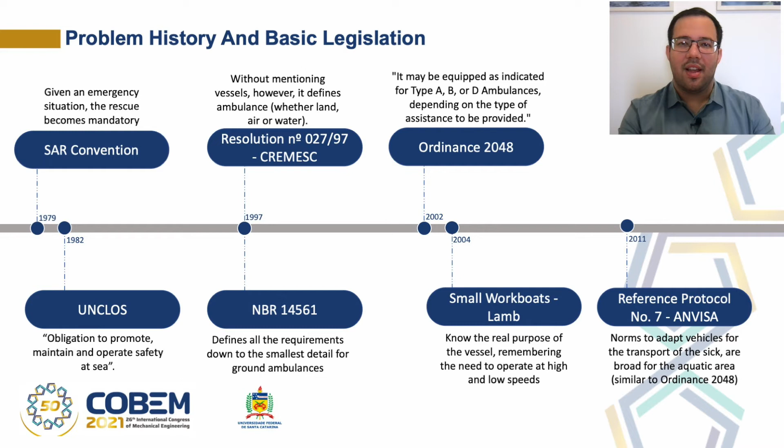In terms of history and legislation, in 1979, the SAR Convention was created, forcing the countries to carry out the rescue whenever there was an occurrence. And as the years went by, new creations and laws emerged. In 1997, the NBR 14561 was created, defining in detail the characteristics and requirements for land ambulances. Only in 2002 is the rescue vessel defined, but without any level of detail. Until today, there is no specific definition.

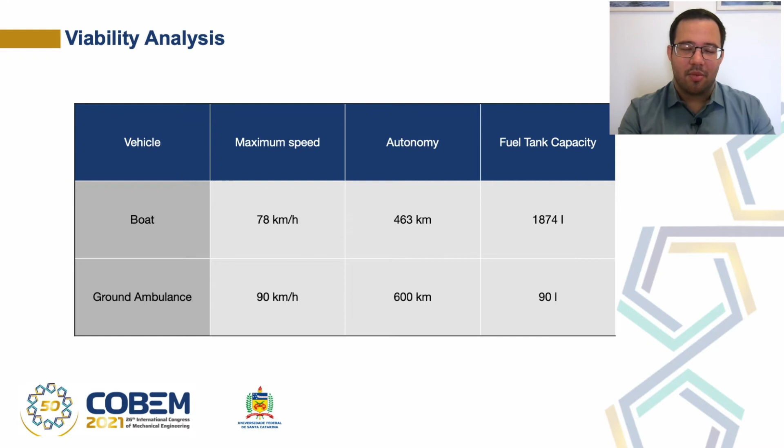To see viability, a direct comparison was made between the rescue vessel and the ground ambulance. The vessel is slower and has less autonomy. However, when applied in practice, there is an interesting result. For that, let's analyze a hypothetical victim on Sambaqui Beach in Florianópolis. Rescue time using a vessel is shorter even when considering an ideal traffic scenario, with all traffic lights open and at full speed for the land ambulance.

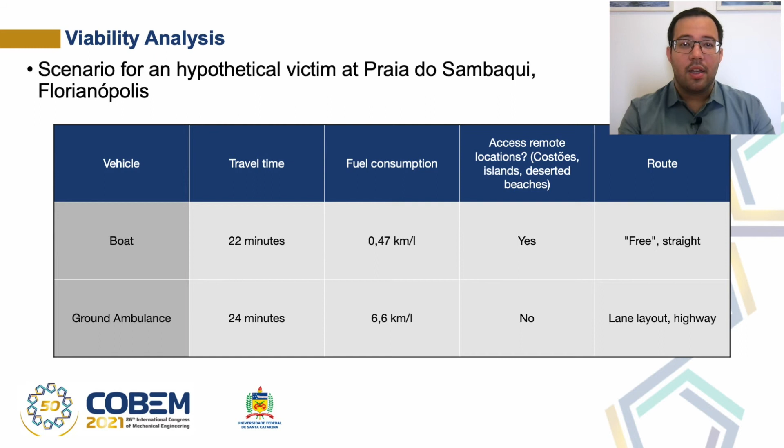This is due to the fact that the vessel has a constant speed over a shorter distance as it travels in straight lines without having to follow a path on the road. And in addition, the vessel also accesses remote locations. We need to keep this in mind.

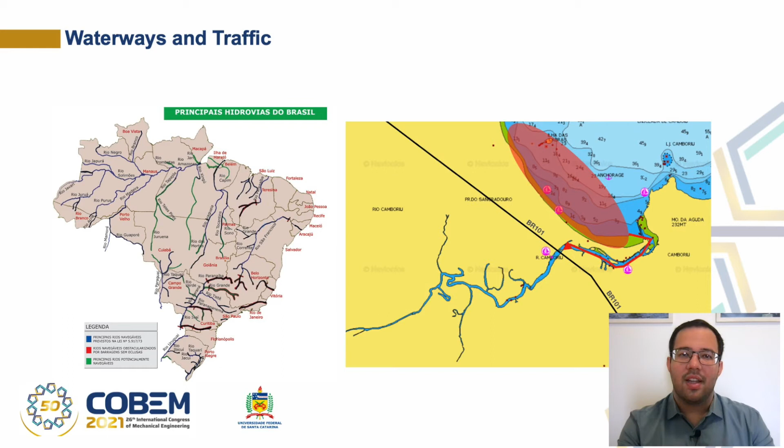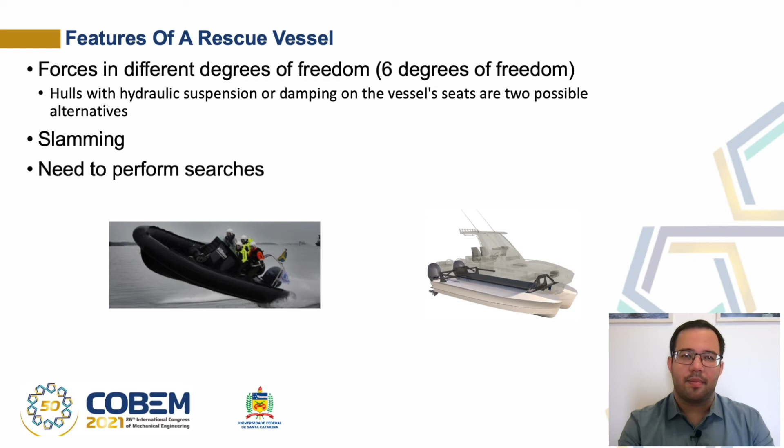Analyzing the operation, in order to define the demands, the division between basic life support and advanced life support must be kept in mind. However, in practical terms, we do not have the need or the ability to operate the SAV, the Advanced Life Support. The SAV requires an on-board doctor and invasive procedures to be performed. Furthermore, it's quite easy to equip a basic unit for advanced support as nothing changes in terms of layout.

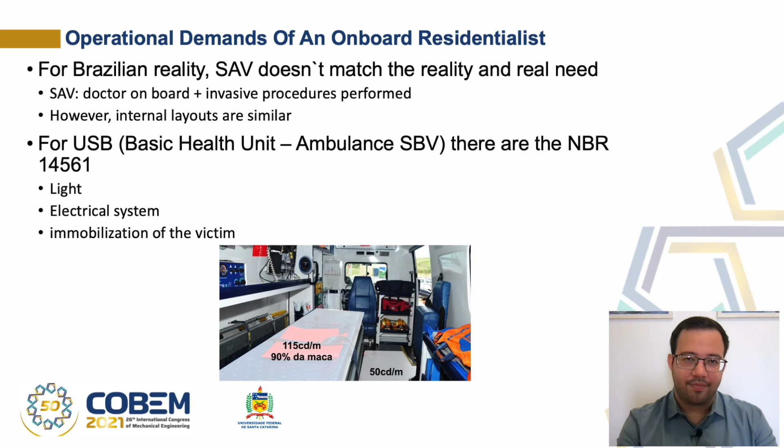Also, with regard to the operation, the vessel needs to be able to operate in storms, to have adequate lighting systems, communication systems, the ability to return to the initial balance position if it capsizes, and have adequate autonomy. Some of the necessary embedded systems are the GPS, radar, security cameras, radio, sonar. These equipment will help the rescuer to reach the victim, to locate the other vessel, to ask for support, to have a view of the entire vessel without having to move, and also make a medical adjustment on the victim.

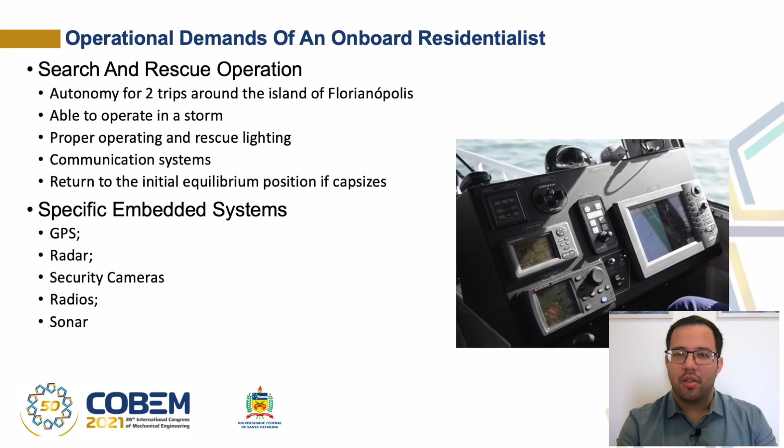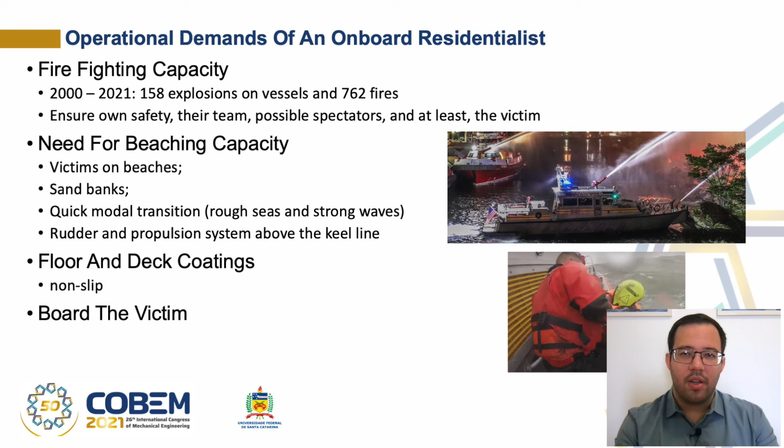Other operational requirements are the firefighting capability, the beaching capability, the non-slip deck, and systems to assist the victim boarding. Firefighting is necessary given the number of occurrences with fire and also the fact that the rescuer only rescues the victim once the scene is safe, therefore any fire extinguished. Stranding is linked to the modal transition, so to support in regions with sandbanks or shallow depths. And remember that both the rudder and the propeller in this case must be above the keel line.

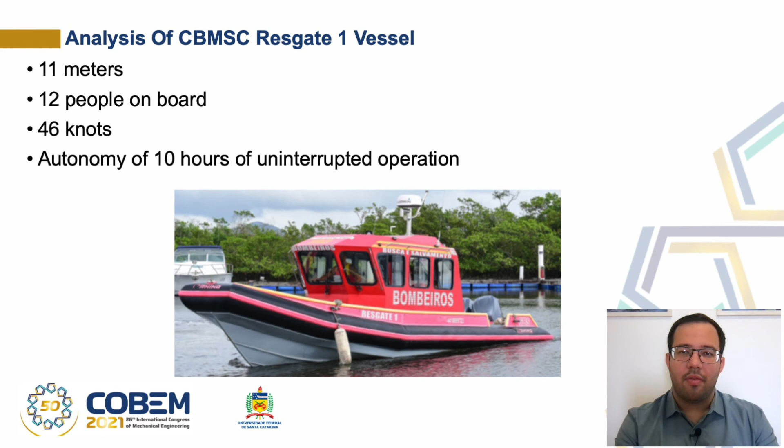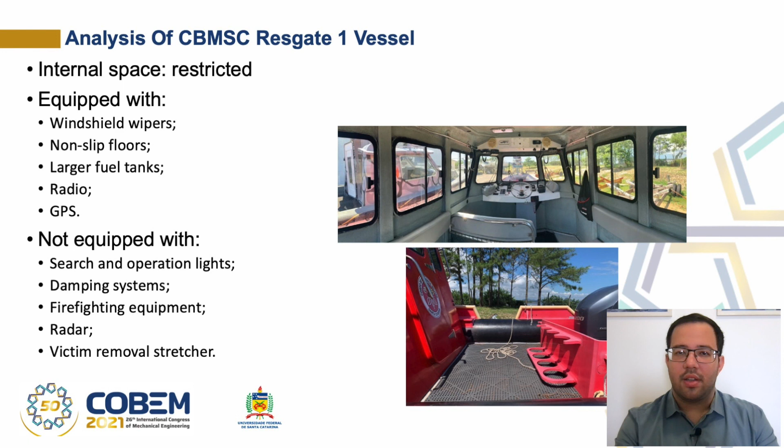Today, in the Santa Catarina region, Reno Defense Company vessels are widely used. So, in order to complement this article, the authors analyzed it based on the points raised here. The Resgate 1 vessel has 11 meters, capacity for 12 people, reaches up to 46 knots, and has autonomy to operate for 10 uninterrupted hours. The internal space is restricted. There is no search equipment such as operating lights, firefighting equipment, radar, or a stretcher to remove the victims. However, it has an enclosed space, windshield wipers, non-slip mat, a radio, GPS, an adequate system, adequate space to start scuba diving, cylinders, and a system to facilitate the victim boarding.

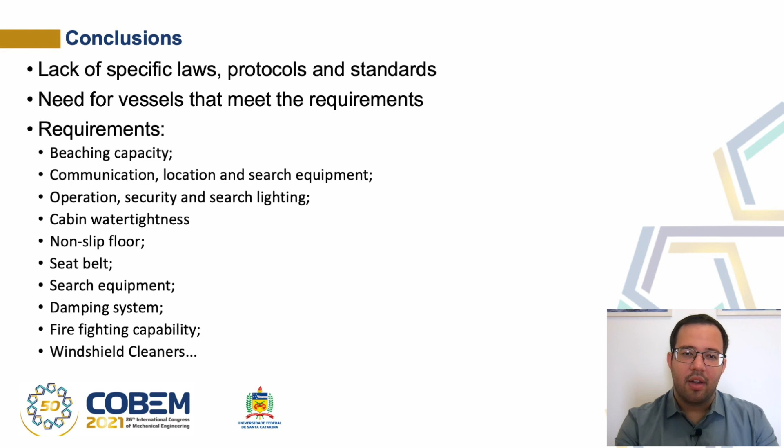Finally, the conclusion was reached that there is a lack of laws and protocols. This lack of laws means that vessels that do not meet the minimum operational requirements are on the market and being used. As for the requirements, beaching capacity was listed along with communication, location and search equipment, operation security and searching lights, cabin water tightness, non-slip floor, seat belts, search equipment, damping systems, firefighting capability, and others. It is expected that with these requirements, a next project will be closer to supplying our firefighter heroes with all the tools and means necessary for them to perform their functions.